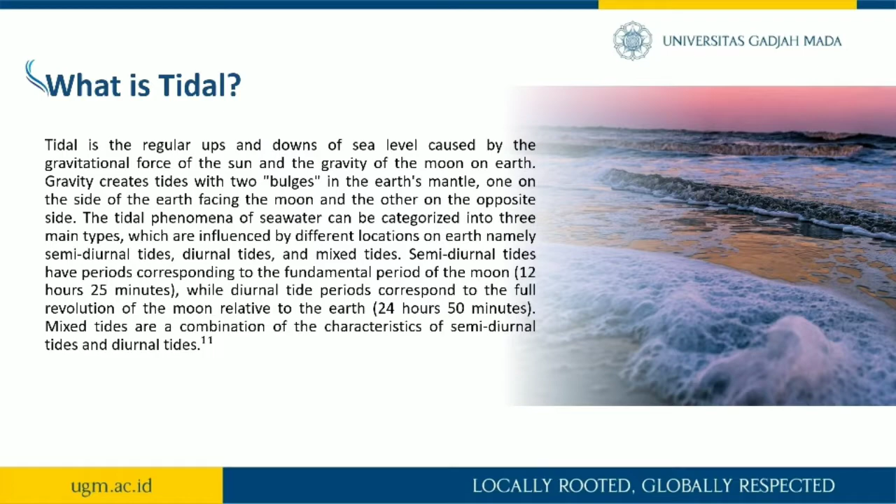After knowing the definition of tidal, let's talk about tidal energy. Tidal energy is a form of hydropower that converts the energy of tides into electricity or other useful forms of power. This energy is also a renewable source of electricity.

Tidal energy uses turbines to generate electricity. This system is similar to windmills that use moving air.

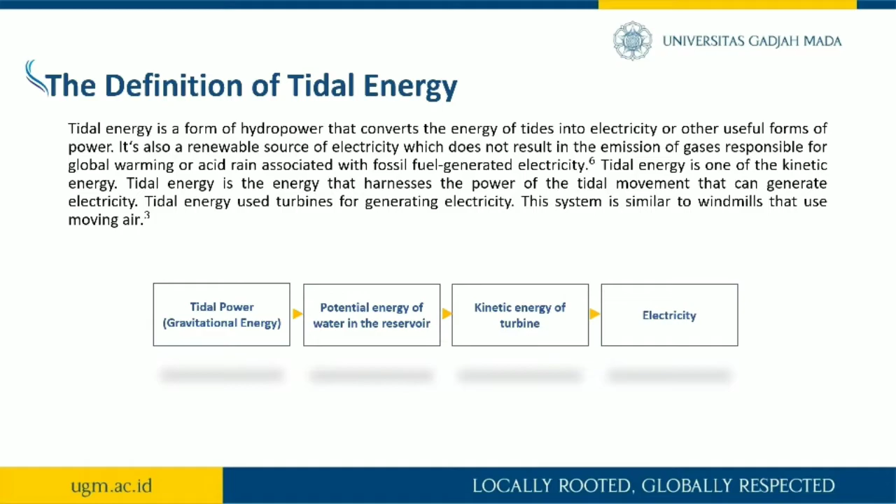The advantages of tidal energy. Tidal power has many advantages. By type, tidal power is a renewable and sustainable energy source that can reduce dependence on fossil fuels.

In terms of health, tidal power includes energy generation that is cleaner and safer because it does not produce liquid or solid pollution. In terms of production and yield, the resulting tidal power output can be calculated accurately, making it easier to integrate with the existing grid.

Tidal power plants have durable equipment with tidal energy four times greater than wind energy.

Then, the disadvantages of tidal energy. In terms of mobility and economy, tidal power plants cannot easily be transported over long distances. Tidal energy is only suitable for people living near tidal water bodies.

High cost of construction, installation, and tidal power generation. In addition, extreme weather events affecting power generation can reduce performance and yields, and even damage the equipment.

Tidal force can disrupt the habitat of coastal flora and fauna. Turbines and dams at the plant can kill over 15% of the fish in an area and disrupt the natural habitats of marine animals.

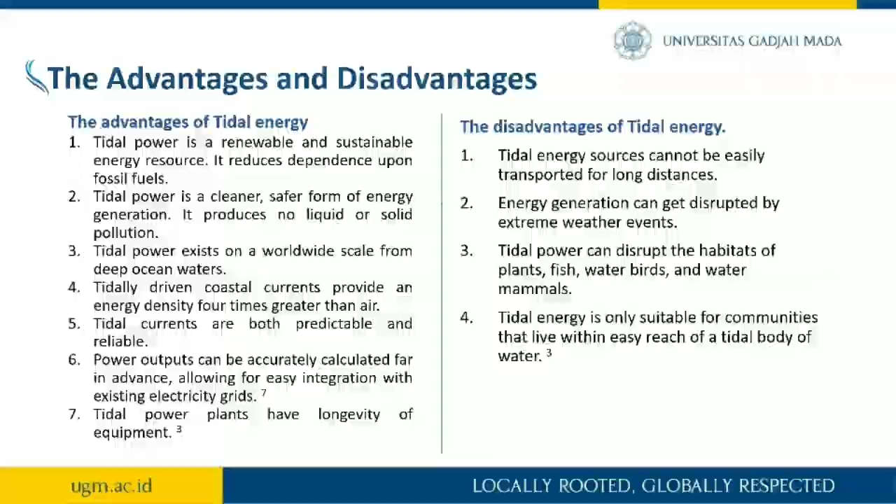Then, how does tidal energy work? The way it works is by building a generator that can harness tidal energy.

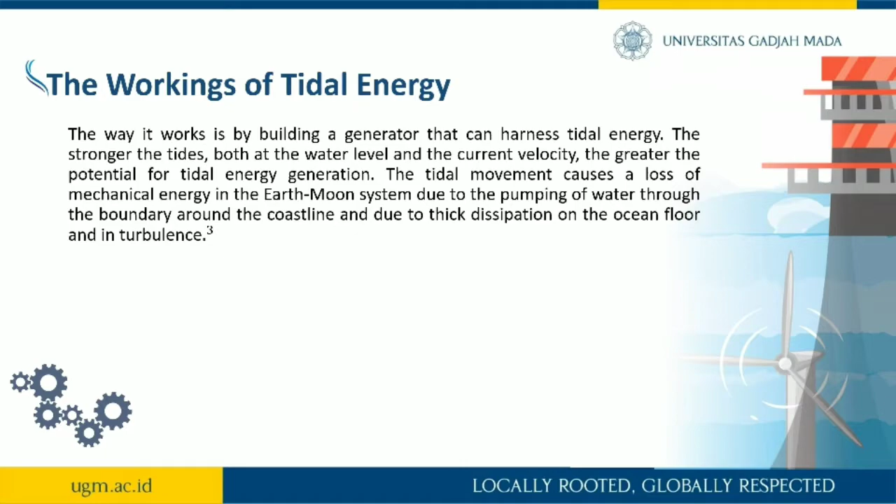The stronger the tides, both in water level and current velocity, the greater the potential for tidal energy generation. The tidal movement causes a loss of mechanical energy in the Earth-Moon system due to pumping of water through the boundary around the coastline and due to thick dissipation on the ocean floor and its turbulence.

The technique to convert the wave energy. Overall, the tidal energy conversion technique has many patterns. However, when viewed from the basis of making the conversion tool, it has similarities with other tools, so they can be classified based on basic concept.

There are 9 basic concepts that have been known for a long time: heaving and pitching bodies, cavity resonators, pressure devices, surging wave energy converters, particle motion converters, Salter's nodding duck, Cockerell's raft, Russell's rectifier, and wave focusing techniques.

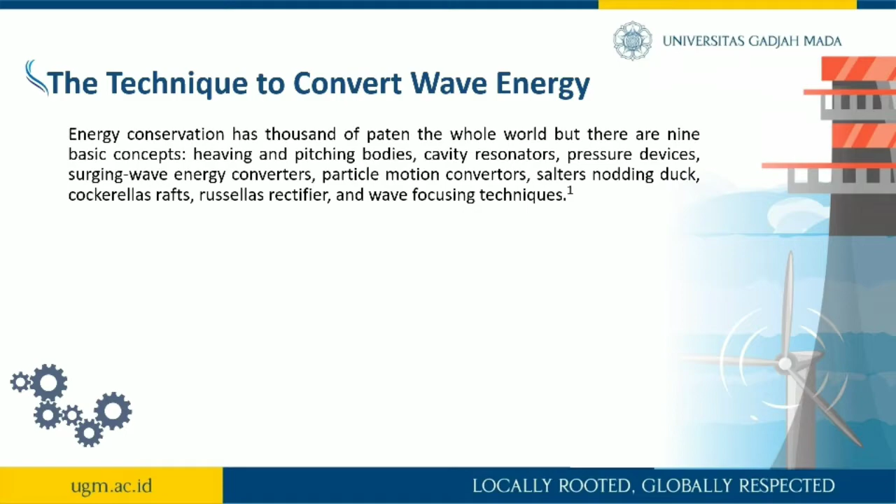The factors that determine the collector selected for the wave energy conversion system are the wave height, the direction of the coming wave, the condition of the wave, topography condition, the location from the shipping lane, high current velocity, and the location near the existing electricity grid.

Then, what are the components of a tidal energy power plant? There are three main subsystems in a tidal energy power plant: the hydrodynamic subsystem, power take-off subsystem, and control subsystem.

Each subsystem consists of several components. The hydrodynamic subsystem is a system that has a function to convert energy from the marine environment to make it easier for the generator to process the energy conversion.

In this system, the energy source will be collected and focused in a region. There is a hydrodynamic bearing that will help the generator in processing the energy conversion.

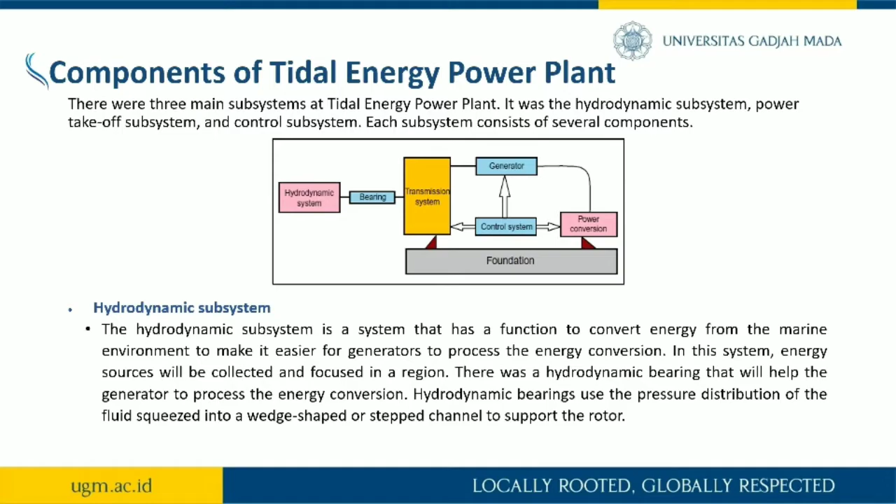The power take-off subsystem is where the mechanical motion of the marine environment is converted to another form of energy. This subsystem contains some devices which generate electrical energy, but there are still a small number of concepts featuring compressed fluid conveyed to shore or other forms of energy conversion.

In this subsystem, generators convert mechanical energy to electrical energy. This conversion can be driven by rotating or reciprocating inputs or shafts. Ancillary systems such as cooling, reactive power, and hydraulic compressors are also included within the power take-off subsystem.

The control subsystem encapsulates components used to control the device in terms of station keeping, power capture from the marine environment, and safety systems. For a tidal energy device, the control subsystem will include means to control rotor speed and its alignment to the tidal flow.

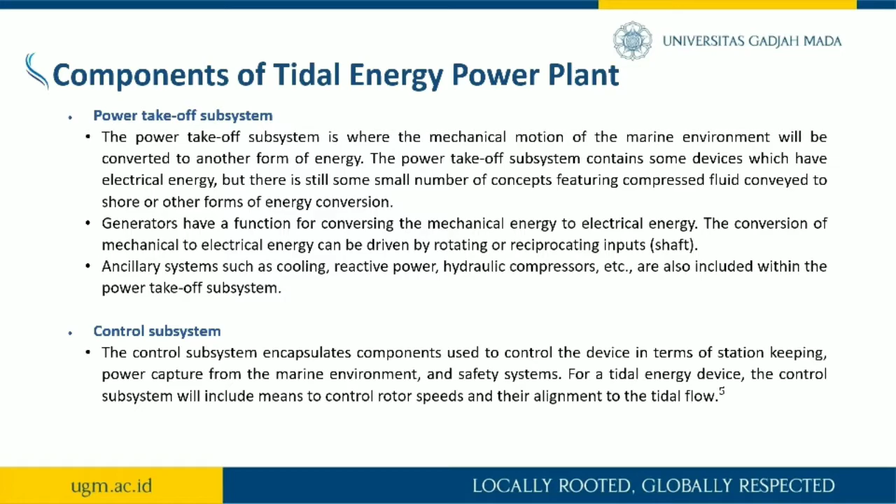Principle of tidal power station. The components of tidal energy forming force are potential and kinetic components. Based on this,

two main approaches are used to generate power from tidal energy: the tidal dam approach and the tidal flow turbine approach. The basic principle of tidal power utilization is described broadly in two ways: first, altering the tidal energy by a barrage system into electricity, and second, altering the kinetic energy of tides by a tidal current system into electricity.

Altering the tidal energy by a barrage system into electricity: a tidal barrage exploits power from the potential energy of the tides. A tidal barrage allows water to flow into a bay or river at high tide and releases water back at low tide. This is done by measuring the tidal flow and controlling the floodgates at critical times of the tide cycle. Barrages make use of the potential energy from the difference in height between high and low tides.

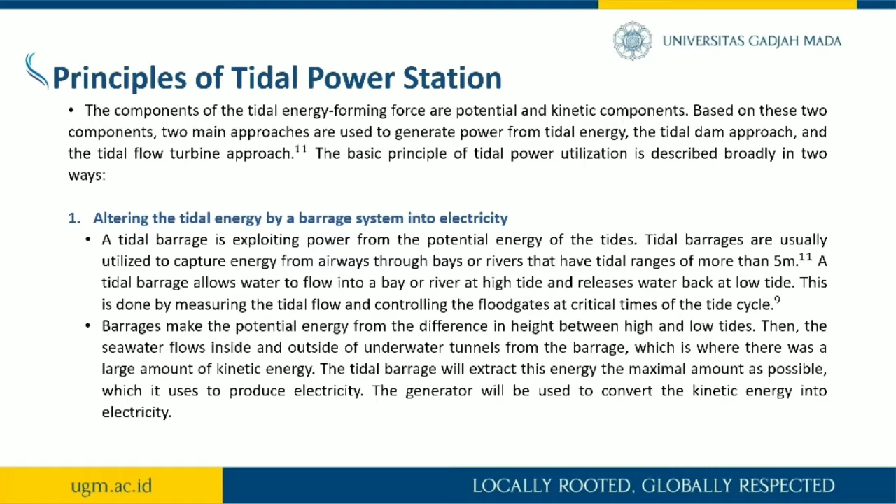Then, the seawater flows inside and outside of underwater tunnels from the barrage, where there is a larger amount of kinetic energy. The tidal barrage extracts this energy, as much as possible, which it uses to produce electricity.

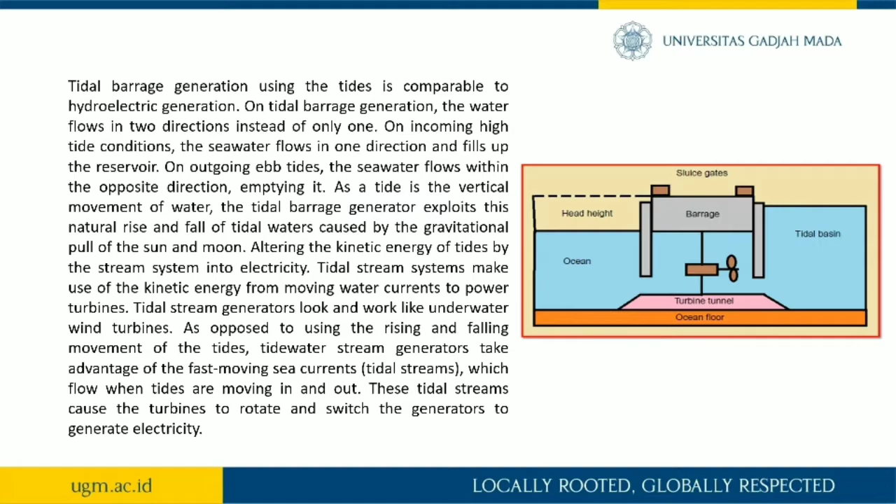The second approach is altering the kinetic energy of tides by the tidal current system into electricity. Tidal stream systems make use of the kinetic energy from the movement of water currents to power turbines. Tidal stream generators are similar to underwater wind turbines.

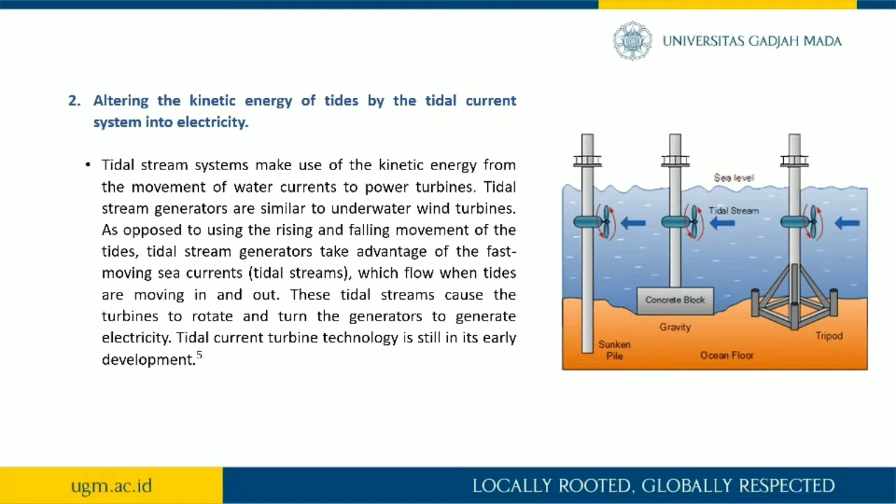As opposed to using the rising and falling movement of the tides, tidal stream generators take advantage of the fast-moving sea current, which flows as tides move in and out. This tidal stream causes the turbine to rotate and turn generators to generate electricity.

There is an environmental impact to the marine environment from this tidal power plant system. There are various alterations, such as alteration of currents and waves, alteration of substrate, sediment transport and deposition, and alteration of habitats for benthic organisms.

The quality of the water surrounding the tidal device could change significantly, for example due to changes in turbidity as a result of sediment transport and deposition caused by altered tidal flow. The current stream will occur around the structure and make the quality of the seawater change significantly.

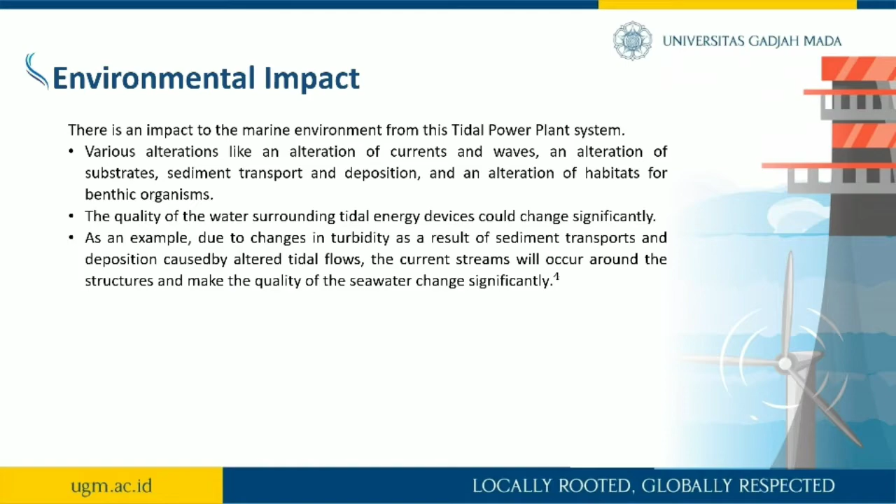The role of government as the decision maker is very much needed in assessing these other factors.